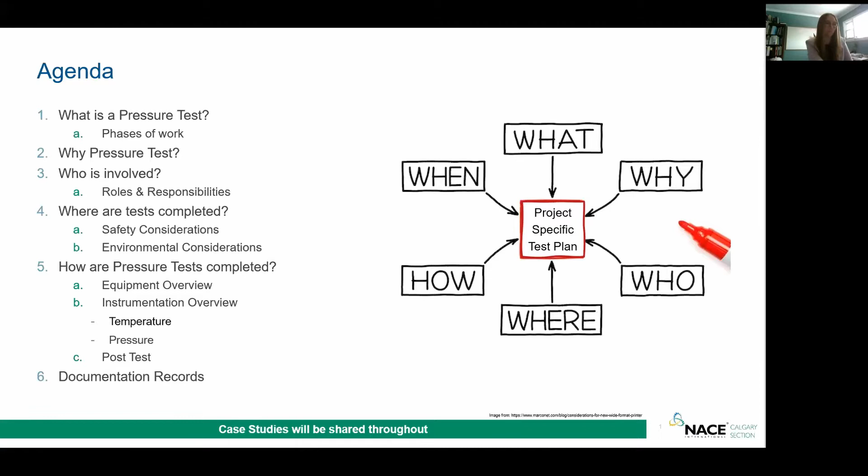Is every pressure test the same? No, it's not. We need a project-specific test plan that answers all these questions, and I'll show you what that is in just a few slides. Here's our agenda for today: start with what, work our way counterclockwise to when, and go through the details regarding different documentation and parts, plus some cool case studies.

So what is pressure testing? It is pressurizing the pipeline to a significantly greater pressure than the pipeline will ever see. A pipeline is sectioned into manageable test sections, capped at the end by a test head designed specifically for the job, or for smaller pipeline jobs, say 8-inch and below, they can be blinded off at the riser with a flange, which can act as the test head.

Water or a methanol mix is typically used as the fluid in pressure testing, sometimes referred to in the industry as hydro testing, although since we're applying pressure inside the pipe, I like to go with the word pressure test. You might wonder why water is used—it's because it's a non-compressible liquid fluid, so in the event of a failure there's less stored energy. In addition, H2O has a high specific heat capacity, meaning it takes more energy to change the temperature by 1 degree Celsius, which is an important point we'll touch on later regarding pressure monitoring.

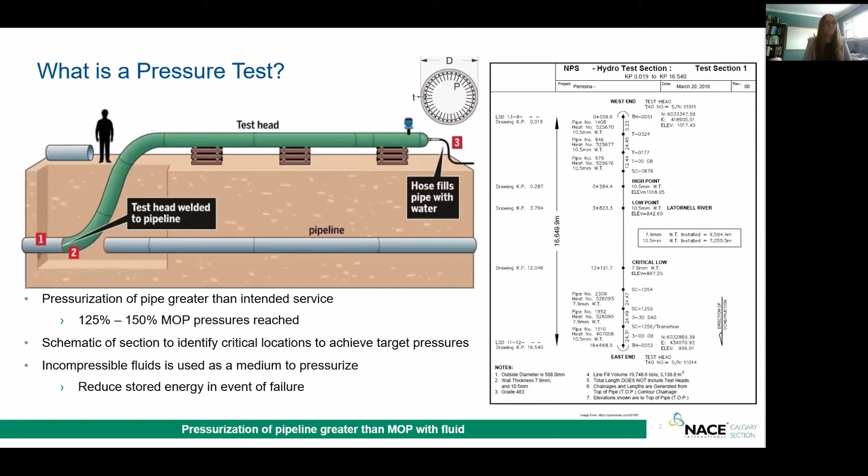So you might ask, what is a pressure test? As per CSA, it's defined as both the strength and leak test component that occur above the maximum operating pressure. How much above the MOP is based on the pipeline design, the class location, the product service type, the elevation profile, and more—this guidance is shown in CSA Table 8.1. Highly recommend, if you don't have that, put it in an easy to find location.

However, there are many more activities associated with pressure testing before and after the test, and let's go through these, because they're all included in the notorious test plan. This is my favorite component because the test plan really sets you up for success for all your activities surrounding a pressure test. Let's walk through them one by one.

When you fill the pipeline, it comes from a fluid source, very dependent on how large your job is. For big mainline jobs, you take it from rivers or lakes. For medium jobs, it can be dugouts. For smaller pipelines, it can be trucked in from a municipal or nearby water source. There's lots of work associated with planning the logistics to obtain sufficient test medium fluid, as well as environmental and regulatory permits to obtain that water. But we're going to focus on the technical today.

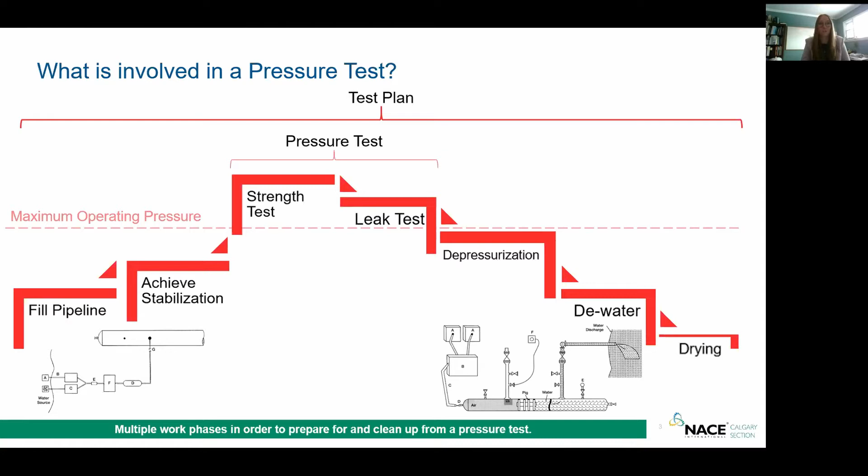So you might think, well Nicki, there's lots of things going on, what's the most important thing? If you've learned one thing from my presentation today, or you recall from your previous education, it is the fundamental principle that pressure, temperature, and volume are all correlated. I pause because pressure, temperature, and volume are all correlated.

So when we go back to thinking about our different test stages, when we're doing our squeeze, we're adding volume into the pipe to increase pressure.

When we go up to greater than 100% of specified minimum yield strength, you're required by CSA to do something called a pressure volume plot. A pressure volume plot monitors the correlation between volume and pressure, how when volume increases, pressure should also increase linearly. We measure it relative to a 0.2% offset, which is the elastic limit of steel, to ensure we're not plastically deforming the pipe as we're pressurizing it up past its minimum yield strength.

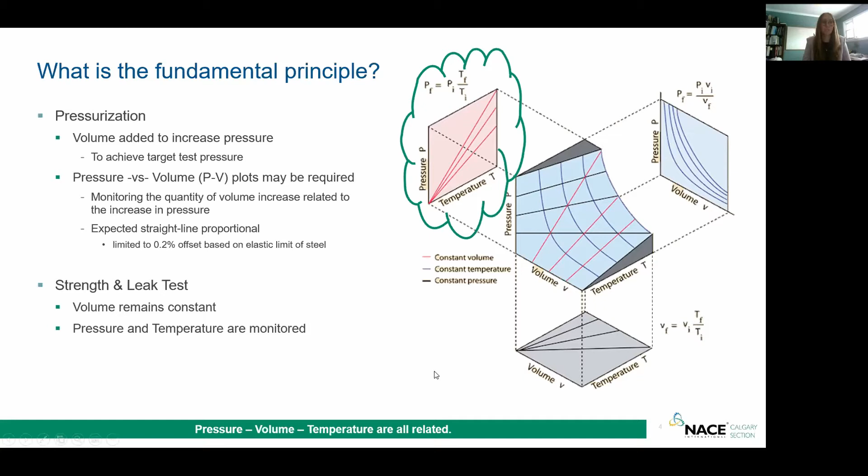In our leak test component, the volume in the pipe remains constant, and we monitor pressure and temperature because this is a long-term hold, typically anywhere from a strength test of either 1 hour or 4 hours, and a leak test is always 4 hours in CSA pipelines. So these are the key topics to have in your mind.

So can you pull up the poll for why should we pressure test? I want to hear it from you. We'll give you guys a few ideas. I should have probably put an answer in there because the regulator says I have to. That's typically a good one. That's why we do lots of things in life.

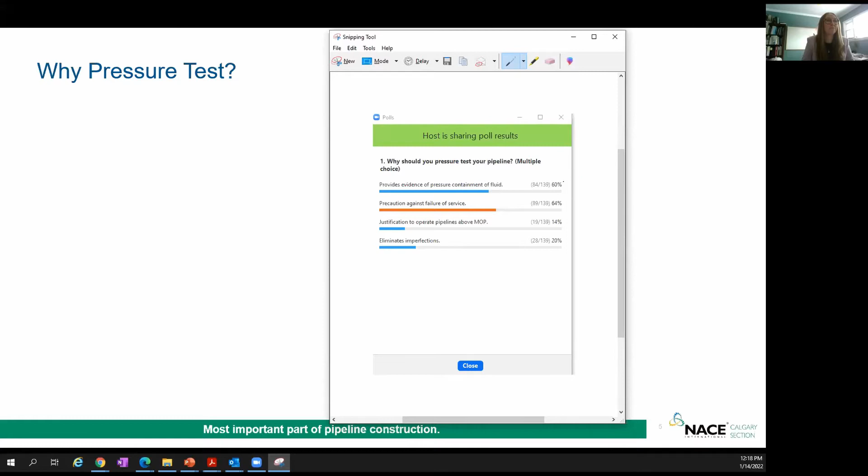All right, so can everybody see hopefully on my screen? So we have 60% of people are correct. It does provide evidence of pressure containment. You are correct, it provides evidence of precaution against failure. Justification to operate above MOP - this is an incorrect answer. It gives you justification to operate to the MOP, trick question there. And it also eliminates imperfections - that's right.

My favorite point is that this really is providing evidence, evidence that you can truly use and lean on that yes, this pipeline is going to be safe to operate. And that evidence becomes a life of asset record that the folks in integrity, such as myself, use to go back and understand what could be the largest imperfection in the pipe at the time it was constructed. So it has a lot of value, this pressure test.

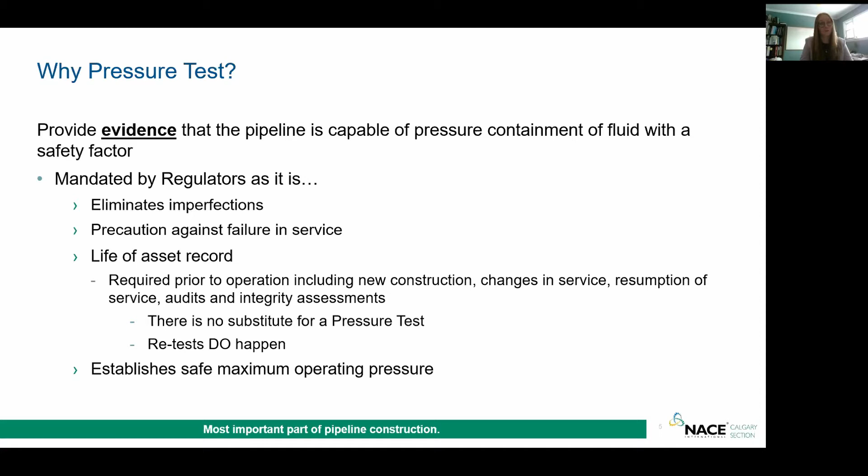Also, yep, and it establishes our safe maximum operating pressure. In my opinion, this is the most important part of pipeline construction. It is also sometimes the highest risk activity because it's done at the end of the job, and people get tired, but it's still a very critical activity that we need to have our wits about us.

So why test? As you mentioned, this is the final check of the asset. It is the ultimate QC activity, and a successful test provides certainty that the line is fit to operate.

So here are a few examples of when we found that maybe this one isn't fit to operate. Here's an above ground HDD pre-test that was unable to contain pressure, which happened in Alberta within the last 10 years. It opened up because there was an existing flaw in the long seam within the material.

So here's the water escaping the pipe - pretty easy to see that water's leaving. On the right, you can see an X-ray, and this darker region is the long seam, and the black portion is actually the through wall long seam failure. So it's pretty important, before you pull an HDD, to have that 1 hour strength test confirmation that you don't have a defective pipe before you spend all that money pulling it through your drag section.

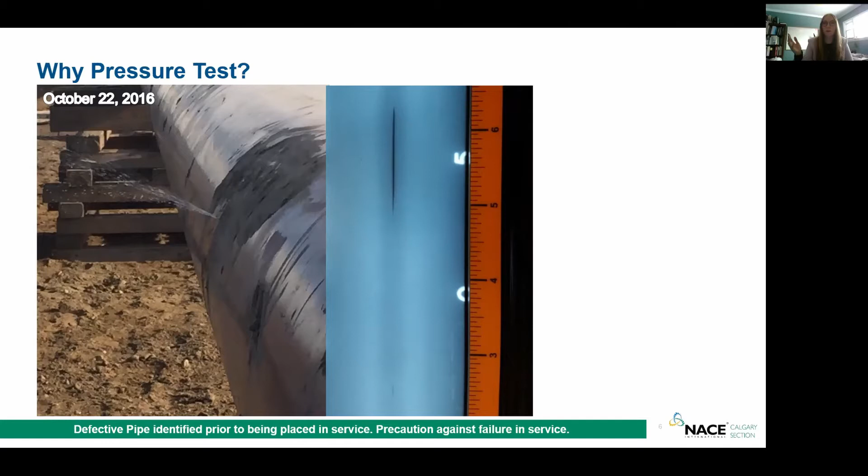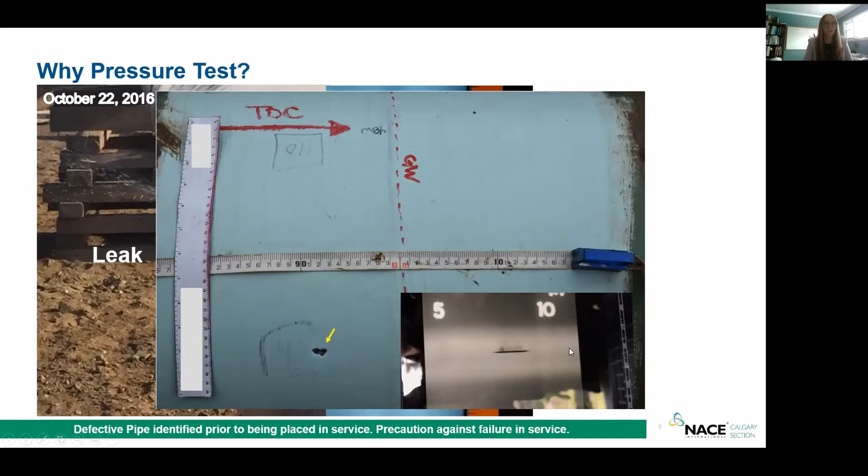Next here is a below ground mainline test, which was unable to hold constant pressure. This slow drop off in pressure was actually also caused by a long seam imperfection, and this was observed in the leak test because it's below ground. It's tougher to identify those issues, which is why we have that minimum 4 hour leak test. Here is again another X-ray where you can see the lack of fusion shown and demonstrated here by the yellow arrow.

Other cases are kind of more obvious test failures. Here's an image of a pressure test chart record where it's recording pressure over time. This is one of these old analog wheels where the red line is temperature and the green line is pressure, and we're monitoring it on a spin chart. As it's being pressurized up, you can see that it's not really a straight line going to pressurization.

It's kind of curved, so the field finally decided to stop pressurization, and you can see that it immediately was experiencing a drop in pressure. Realistically, there's lots of signs that as you're getting that curved approach, there's an issue and the pipe is either deforming or unable to contain pressure. So this is another example of why it is so important to have experienced and competent people on site overseeing the testing of your pipeline.

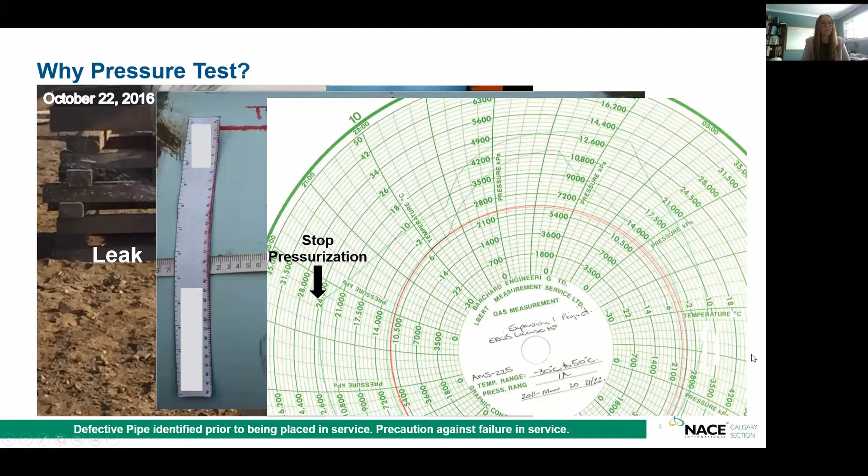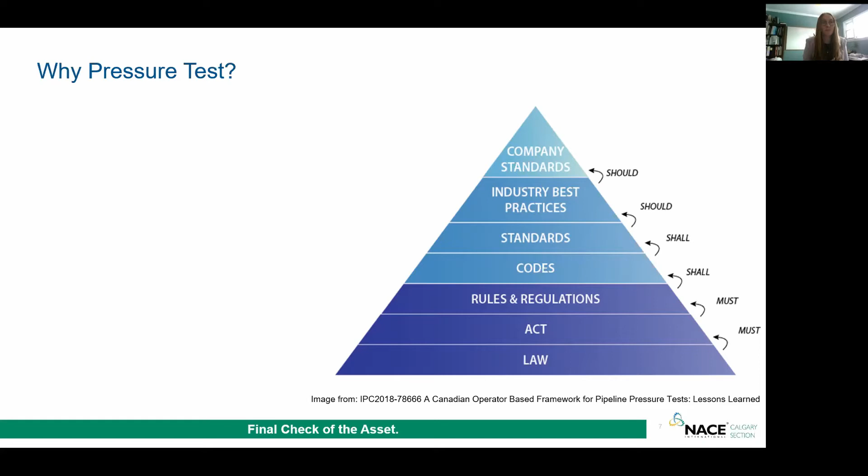So that takes me to also why test. Just to give you some shameless self-promotion, I wrote a paper in 2018 that goes through the framework of some lessons learned, so feel free to reference that. But it's good that we understand our foundation. We have laws, acts, and regulations that we must follow as prudent operators. Then there's codes and standards that help us define and streamline what that is in order to meet those acts, laws, and regulations.

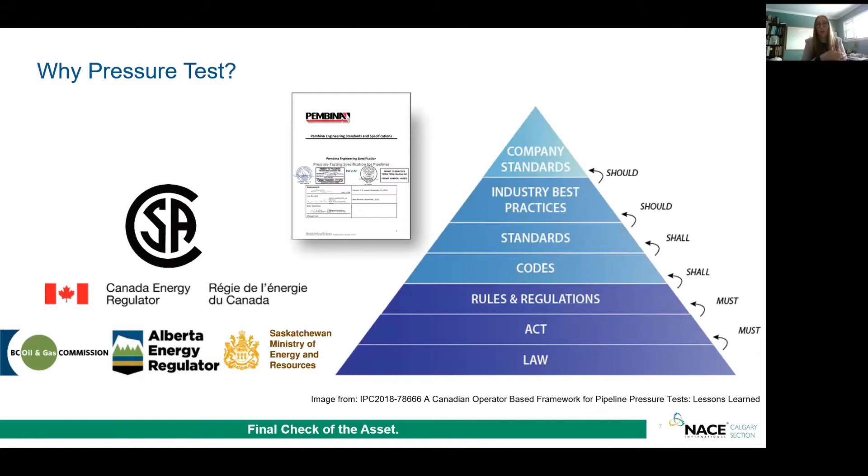And then lastly, there's company standards and specifications. These are critical to define at your organization how you're going to do your testing activities, to get that final check of the asset. So in a company standard, which would be my recommendation of where to put this, rules should be clearly defined. I've highlighted 4 key rules that occur in pressure testing. Let's start with the designated engineer.

They're to take professional responsibility for the test, both establishing the test pressures that need to be met during the test, giving their expertise to ensure you get an appropriate test, and then lastly, actually validating those results.

A little tidbit of knowledge I'll give everybody is that EGBC, in December of 2021, last month, issued a draft for review, which is the field practice guide for engineering and geoscience work. In here, they're following a similar approach, if not the same approach, as what's already implemented in BC. That's actually mandating that there is an engineer who takes responsibility for the final acceptance of the full design and construction. So a role and responsibility in your test spec that highlights this is recommended.

The project manager is always accountable for absolutely everything, making sure that all the key stakeholders are plugged in at the right time and that they're following the adherence to both the code and regulation, but also the company specifications. The contractor plays a massive role in pressure testing.

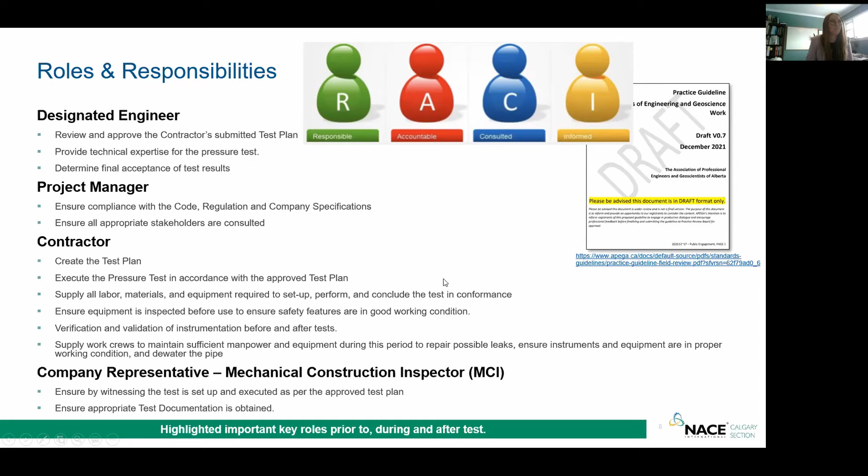There are many different roles that happen, and at different stages in the test they flip from responsible, accountable, consulted, and informed. To give a brief overview, Louise and I, as part of Pembina's pressure testing specification, came up with a visual RACI chart to show at what stages which roles are engaged during the pressure test.

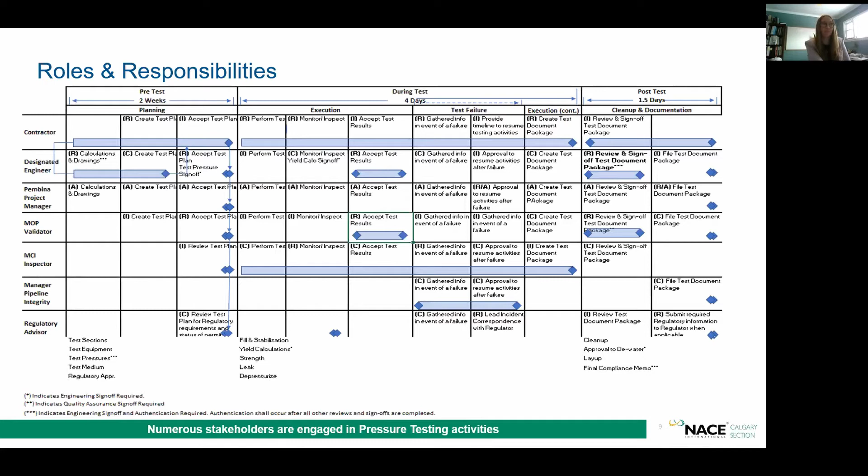This covers both the planning perspective and the execution perspective, if something goes wrong and you're into a test failure and need to restart execution from the beginning, and then the cleanup and sign off of documentation. I would recommend that this be done for each company to fit in with the activities that you do. So where do tests happen?

They predominantly happen in the field, below ground, with a small amount of areas exposed at the ends, which is shown here on the big picture of a big test head on a big mainline job in the summer.

Above ground tests are also done for pre-tests as that quick quality check, as I showed what can go wrong if you don't do that. And then also sometimes in a shop test for pre-tested pipe for smaller quantities, for cutout sections. This is what is done for integrity work as well.

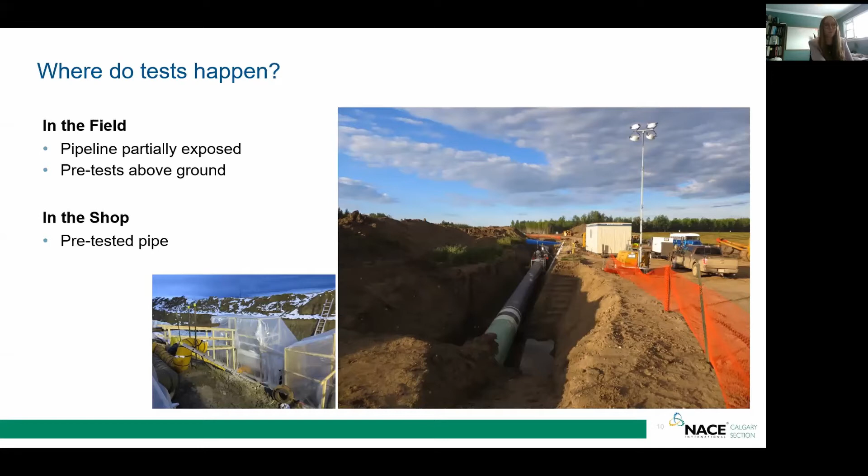You'll note here, at the bottom left, this is a picture of hoarding where you heat the exposed ends in the winter to make sure you don't get freezing of both your instrumentation lines, and then you don't get an ice plug as well.

So how do you heat it? Well, this is connected to a heater here that is on site. Boilers are also used in cold weather to heat the water to prevent freezing. Water trucks can transport small volumes of water to site.

The fill pump is also used to fill the pipeline, and this can be used from the natural water source through the side, or used during when you're squeezing it to stabilization.

Then the pressure truck either has a fill pump or a higher rate fill pump, which here we're showing as a pressure truck to squeeze the test section. And then finally, you need an air compressor on site to be able to dewater and dry the section.

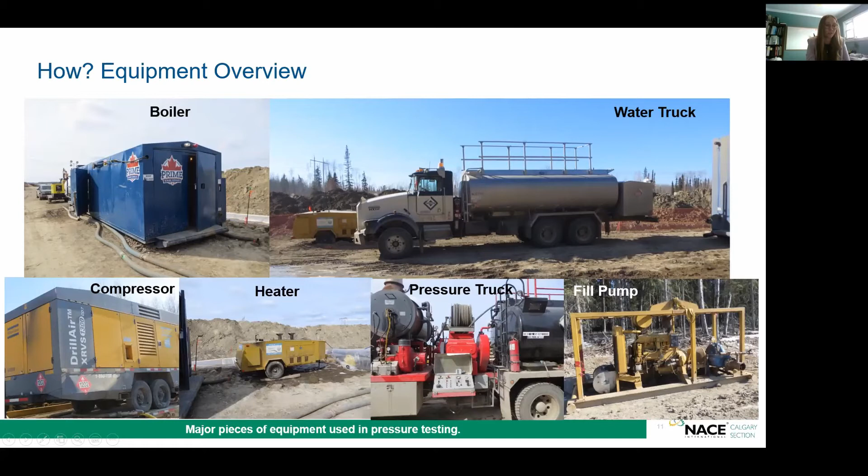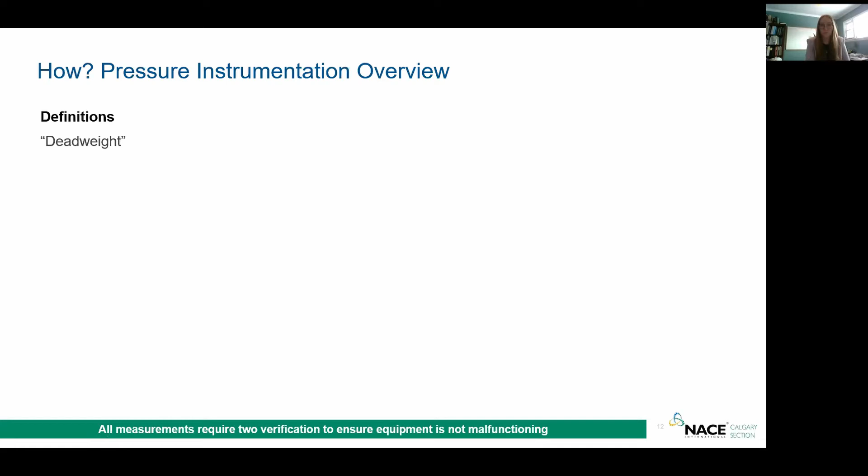So what about instrumentation to get a good test? We need a dead weight. I don't have a poll on this, but does anyone know what a dead weight is? Is it your typical ball and chain?

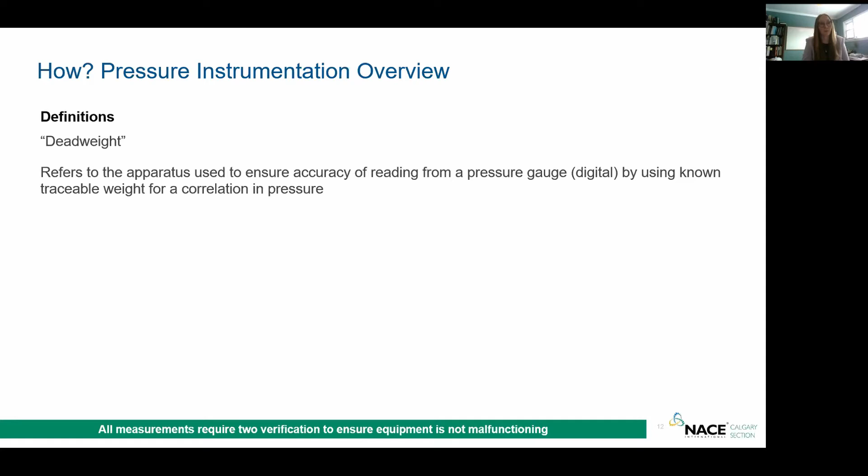Here's a schematic of what a mechanical dead weight looks like, where you actually have a physical weight that correlates to the pressure as it's connected to the test section.

This is the old school way of doing it, and I think the right way of doing it, is having one of these mechanical dead weights on every single test to make sure that all your instrumentation is working properly.

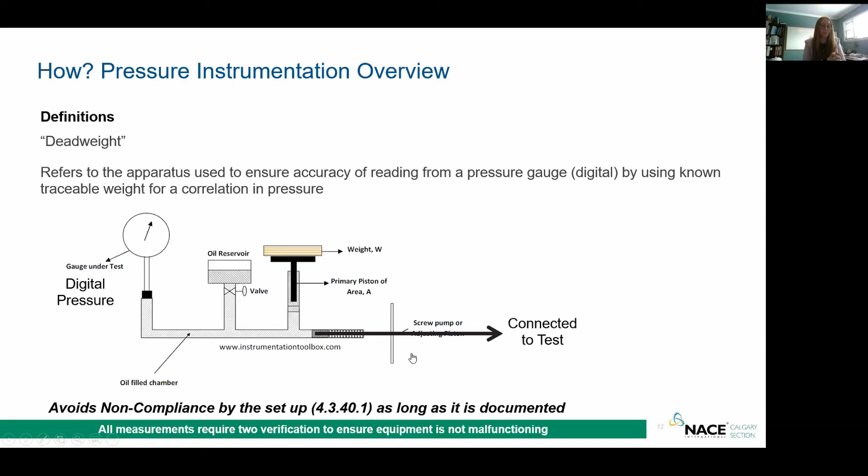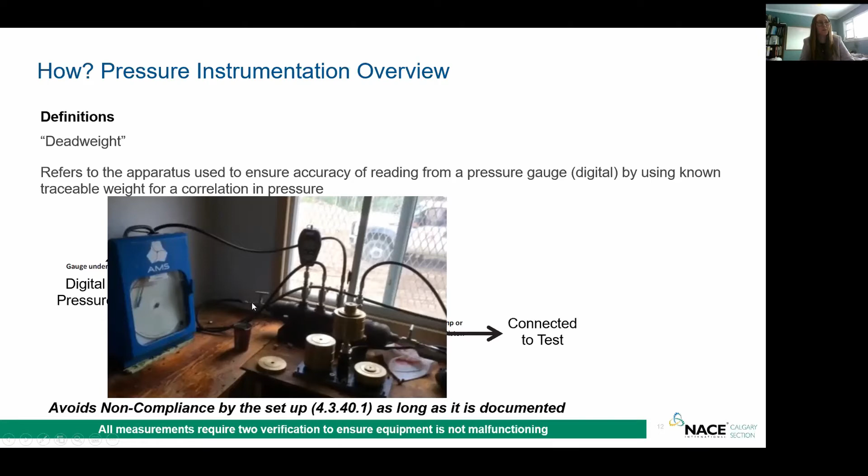So you're familiar with this. This is our digital dead weight that should be part of our setup. And then we have these chart recorders.

Chart recorders are analog spinners that spin as a function of time. You can set them on 1-hour, 12-hour, or 24-hour spin cycles. And you can have them be single pen or dual pen to take in pressure and temperature, or just pressure.

So we have everything connected in through the pressure recorder, through the assembly on one side, which is typically a test shack. Here's just a little schematic.

Now, you don't have to record what's on the pressure recorder itself, because it's already a record in itself. It's a chart — the pen is doing the recording for you.

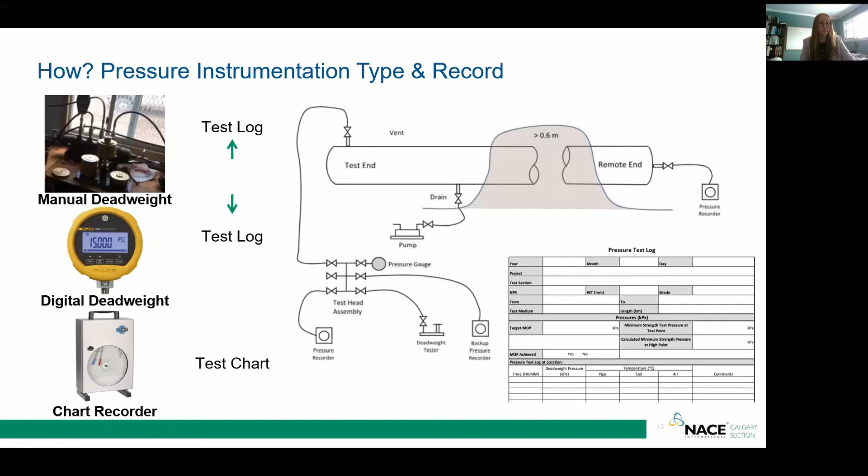But what you do need to add in is your manual dead weight measurements and your digital dead weight measurements into some type of test log. I prefer to have a test log on paper; however, the AER does allow for digital records.

Hey, what about temperature, Nikki? You always say temperature is important. Anybody who knows me knows my opinion about the word ambient. Ambient temperature means what is around you, and since we're testing the pipe, it's what's around the pipe.

So in a buried below ground test, what's around the pipe is actually the soil. So you have the pipe temperature, you have the soil temperature, and you have the air temperature. These are the three temperature types that should be measured so that you can understand how the test medium fluid can be changing, so that you can accurately monitor pressure, because pressure, volume, and temperature are all related.

And a digital probe is required for the key temperatures so that you can validate results that are on your chart recorder.

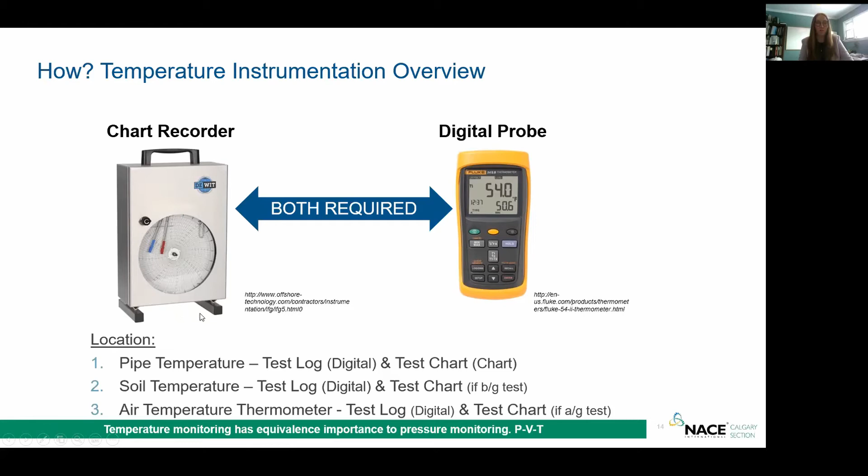So where do you put all these things? How do you set them up? It's important that your temperature sensors for your pipe and your soil are representative of the majority of the test section being tested. That is to say, if it's mainly below ground, you need to have a temperature representation that is in effect below ground, not out here exposed to the elements.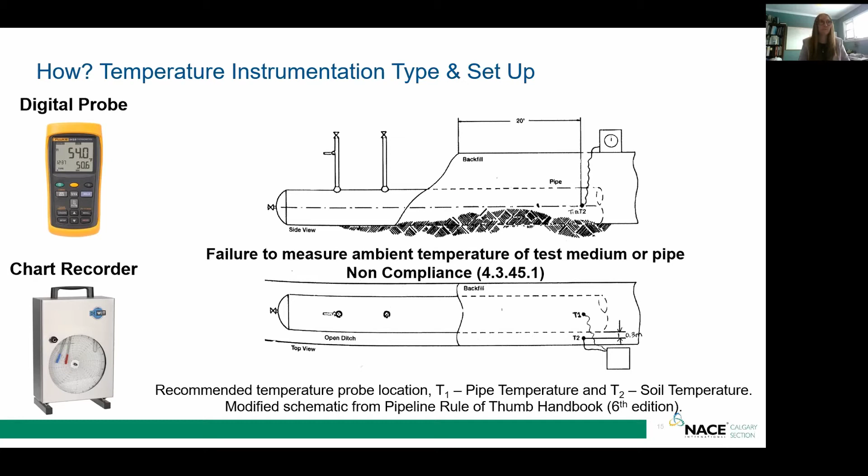So next we're going to go to a poll. Now that I've taught you about temperature, my favorite topic, which probe is acceptable for a below ground mainline test? Is it A, on the left, a temperature probe under a rag on a pipe, insulated, or is it B, a pipe probe under buried soil?

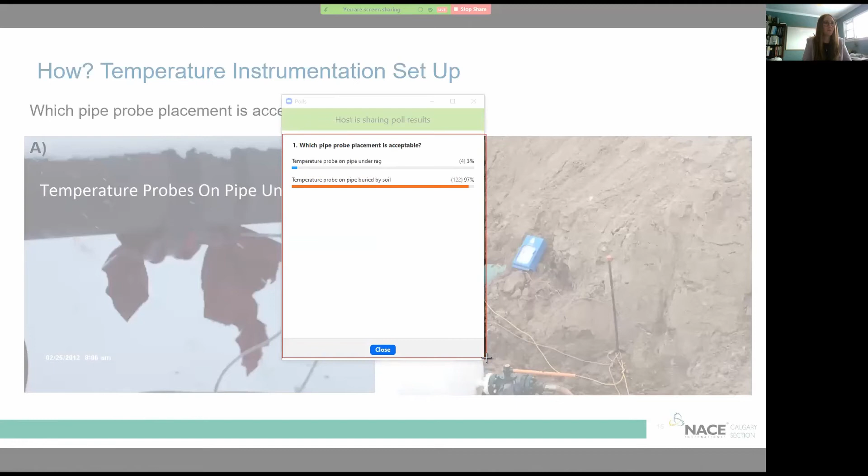Oh, only 4 people. You guys are a smart group here. Only 3% of participants said that the pipe on the rag is acceptable. Pipe under the rag would be acceptable if we had an above ground test in winter conditions where we were pulling an HDD section. However, we have a below ground test, and so therefore our probes need to be below ground.

So, Nikki, you're talking about verifying instruments. When do you do this? You need to verify, not calibrate, but verify. There's a difference. Calibration means that it comes to you in a state that should be in working order, and you have a record to prove it. But you need to verify those instruments before the test, during the test, and after the test.

And you do that by cross-checking different pieces of equipment to each other and monitoring if there's any differences or deviations between the two, and whether they stay the same or skew during the test. Instruments can fail, and if the instruments fail and there is no redundancy, then you're going to be required to do a retest.

That's why, even though you only need one chart recorder for your record and one digital dead weight for your test log, it's always best to have a few chart recorders and a few locations where you have that digital dead weight so that you can see what your pressure is. That way you can prove that you verified your instruments and nothing has failed on you.

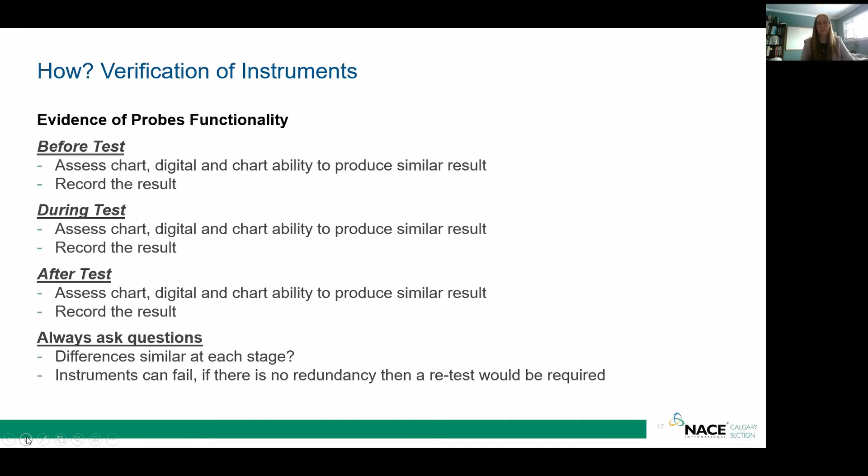Here's an example of what can happen when instruments don't work. This was an above ground pre-test that was being done, and it was being filled by a pressure truck, and the gauge on the pressure truck that was being displayed to the operators malfunctioned. And so what this led to was an overpressurization of the pipe on the right of way.

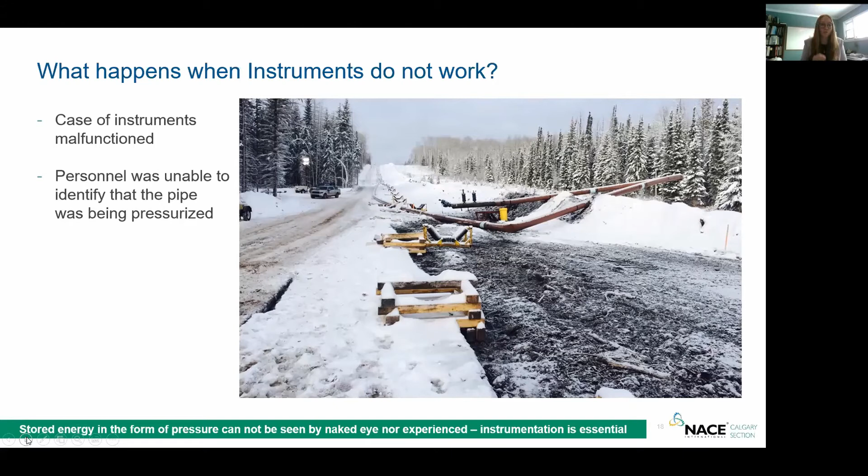Another key thing we need to help people in the industry understand is that energy is stored in the pipe during a pressure test, and you actually can't experience it or see it with your naked eye until it is released. So instrumentation in the right place is crucial to having a successful test.

So we got a successful test, not like that last picture that I showed. What do we do after the test? You're talking about dewatering, drying — what's all this about?

So what this is about is you need to have an approach at your company. On the right-hand side here, we have a quick flow diagram to say, okay, what water source are you using, or what medium are you using? And based on that, how are we going to protect the pipe from any deleterious effects from that test medium?

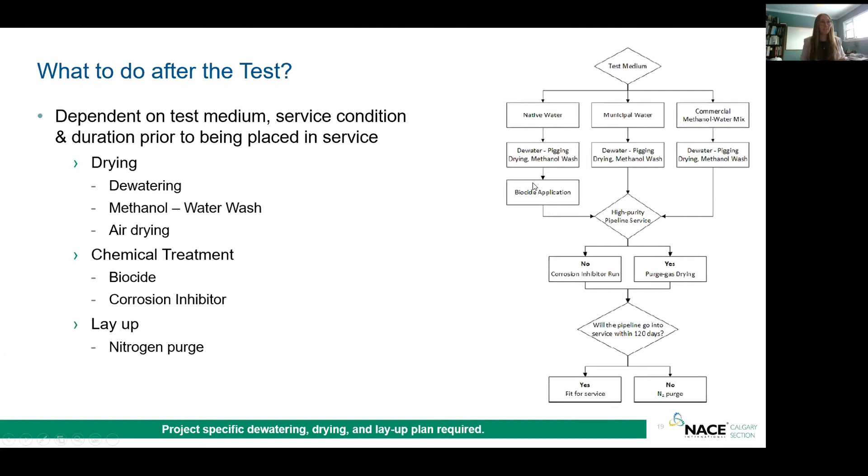And that's actually mandated in CSA under section 8.1.8, and we need to consider it. This is how Pembina has chosen to consider it. This may not work for your company, but it's something to take into consideration — you need to dewater, remove the water from your system.

You need to make sure that, and for Pembina, we've decided to go with a methanol water wash, not sitting stable there, but just a quick wash to help speed up the drying process to get that accumulated water in those low-lying spots dissolved into that water methanol batch and to remove it from the pipeline.

In the cases of native water, it is mandated to use a biocide application, so that way we don't have, and I got a whole bunch of corrosion engineers on the phone, a bunch of MIC chewing away at our steel.

And then the next big consideration is what type of pipeline service is this going into? If this is a spec ethane line or spec natural gas line, it may not make sense to run a corrosion inhibitor because that's going to impact your instrumentation and your product delivery for your customers. So you need to decide which way you're going to go: use a corrosion inhibitor, or go hardcore purge-gas drying?

There's a great paper back in 2018 called How Dry is Dry from Nova Gas, and they really explained how you can do dew point drying. It takes many hours, however you get a great product in the end and it's really your only option for those high purity pipelines. However, you have a chance to go with a corrosion inhibitor.

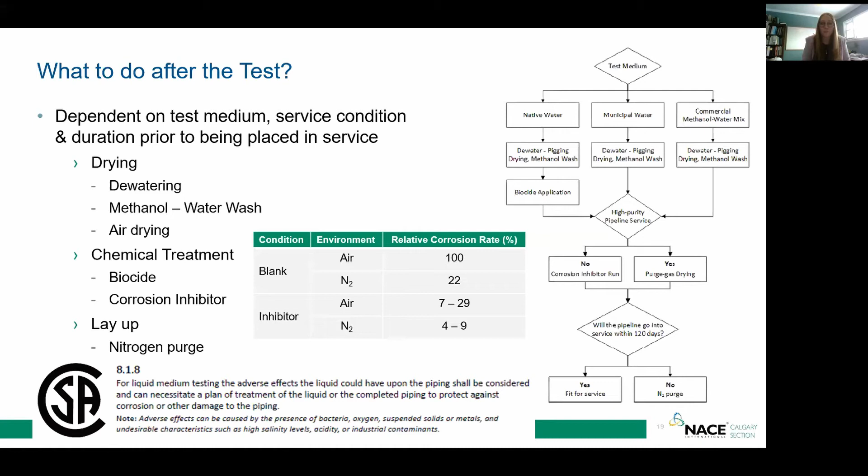they're appropriately addressing the corrosion that could happen in their line, and integrity specialists working with your chemical vendors to find the right solution for your pipelines and your service.

And failure to do this, there was another update to Manual 5 almost a year and a bit ago now, October 2020, that correlates a non-compliance with not following section 8.1.8 in CSA.

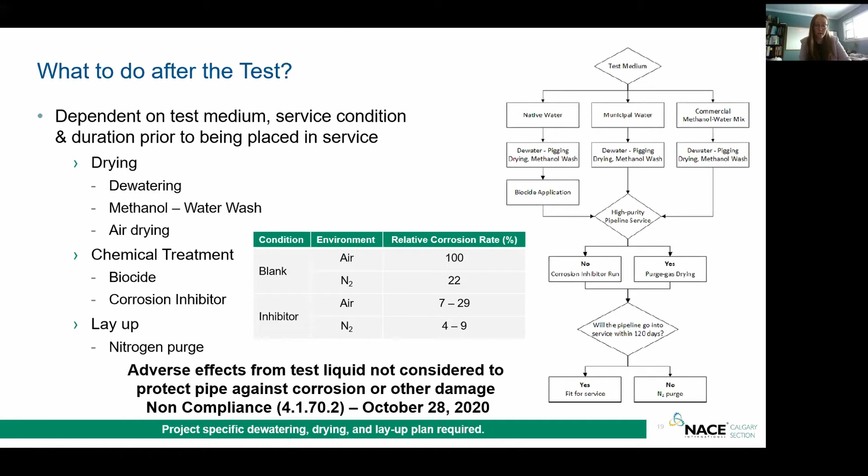Documentation. We're close, we're almost at the end everybody. Quality documentation is required. If you don't take great documentation, then you practically didn't do all the activities that you said you did.

So in our specification, and I would recommend company specifications or even for contractors, laying out the expectation of what records are going to be provided at what time throughout the project and what that final turnover package looks like, so that everyone's on the same page for what we need to do in the field to be able to have it accepted by the designated engineer and potentially your quality control individual or an MOP validator in your company, because this is a life of pipe record.

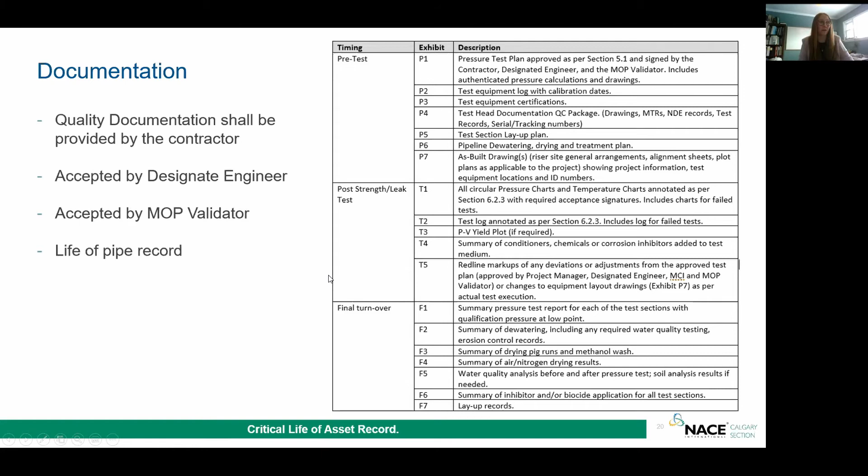Now, with all that said, let's do questions.